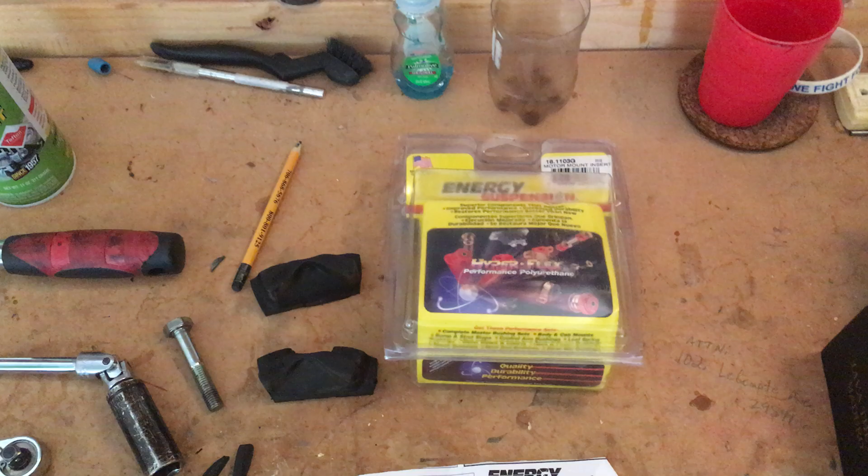Hey, what's going on? This is a review of the Energy Suspension Hyper-Flex motor mount inserts for a 5th generation Prelude. This will also work in a 4th generation, I believe. I'm going to just quickly talk about install and impressions.

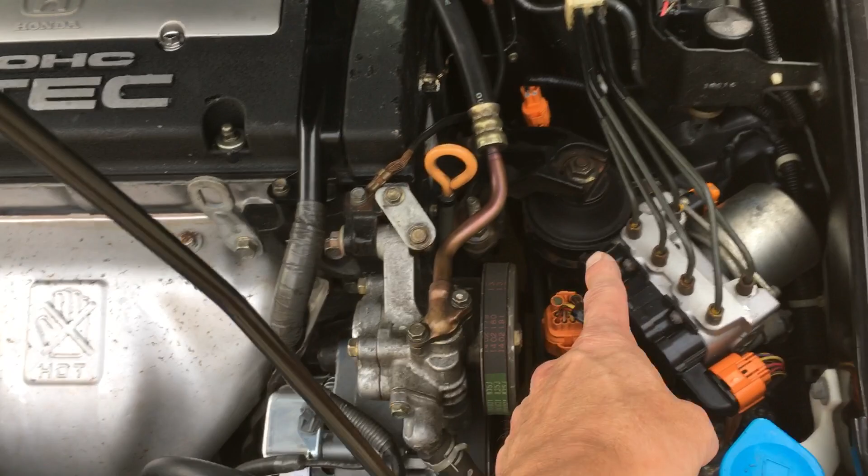So let me show you the car. I've already installed it, so this will not be a detailed install, but I'm going to tell you everything I think you need to know. Basically, there's 4 mounts on this car. There's a driver's side, a passenger's side. There's a front right there, and you can see the mount insert in there.

It's this soft poly right here on either side of it. And then the other one is right under the throttle body. I'm not going to show it to you, but it's down there. If you're watching this video, you know there's one of the bolts right there in the center of the camera.

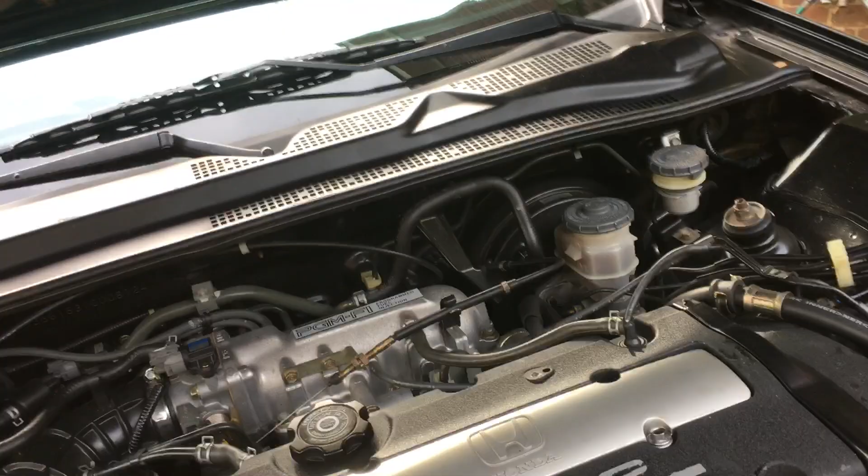So the idea with these is with traditional solid motor mounts, you get a better feel because there's more connectedness without the air in the soft rubber of the mount, but it also adds a lot of vibration. So this is sort of a compromise. You put a poly insert into the existing stock mount, and it increases the feel.

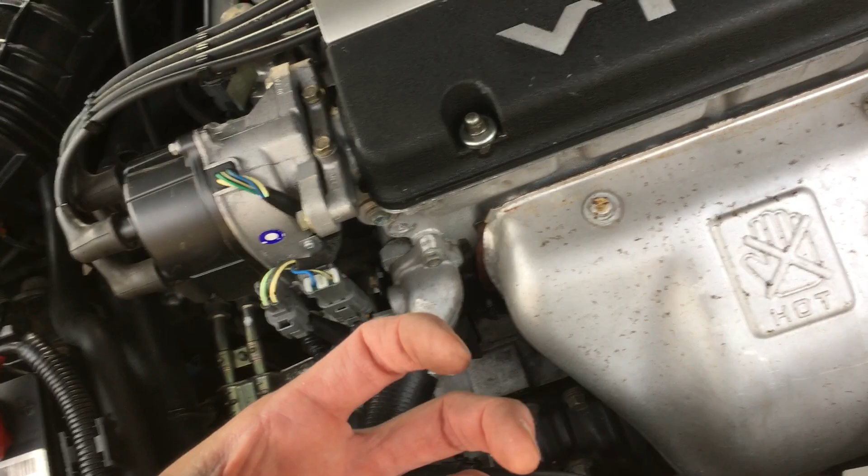You know, it's sort of like having shoelaces untied running, and then you tie them tight and you run. That's kind of the difference. You tie them tight, that's how it feels. So the car feels tighter. You get a little more sound, feel, vibration. It's more bassy.

And then also when you're shifting from first to second gear, or any gear, when you come out of gear, when you let go of the clutch and you come into gear, there's a little bit of movement of the engine, and you can feel it in the whole car. When you put an insert or a solid mount in, it reduces that, so it's instant. As soon as the gear engages, you get the power immediately. So it's a subtle difference, but it's enough to make a little bit of difference in feel.

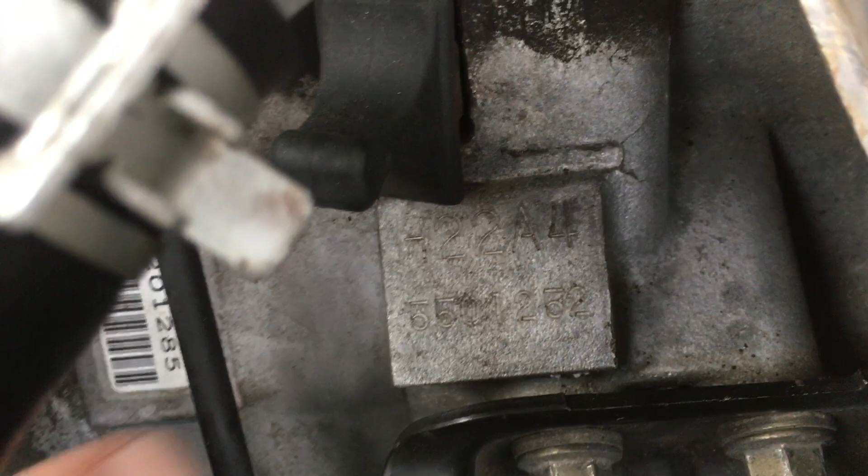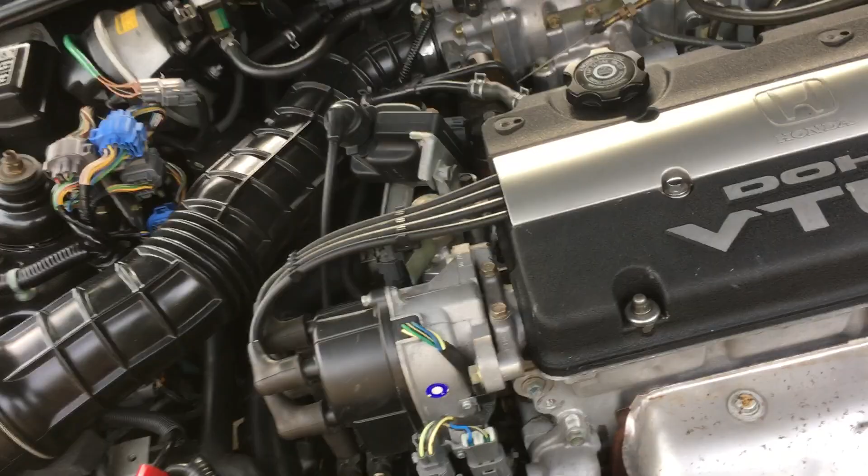And Honda's big engine, the H22A. So it's enough to make a difference, and the car isn't faster, but it feels faster because there's less slop in between shifts, is sort of the idea. So how do you install this? Let me show you.

This is all I used. I recommend getting some silicone lubricant. Spray that all over the mounts, especially when you're putting the inserts back in, because it makes things move in and out a lot easier. And basically you just need a ratchet. I pretty much did everything with a 17, a couple extensions, and a universal joint right here at the end. And then you'll also need a 14 and a 10, which I'll talk about. But let me just talk about the install real quick, and then I'll talk about impressions.

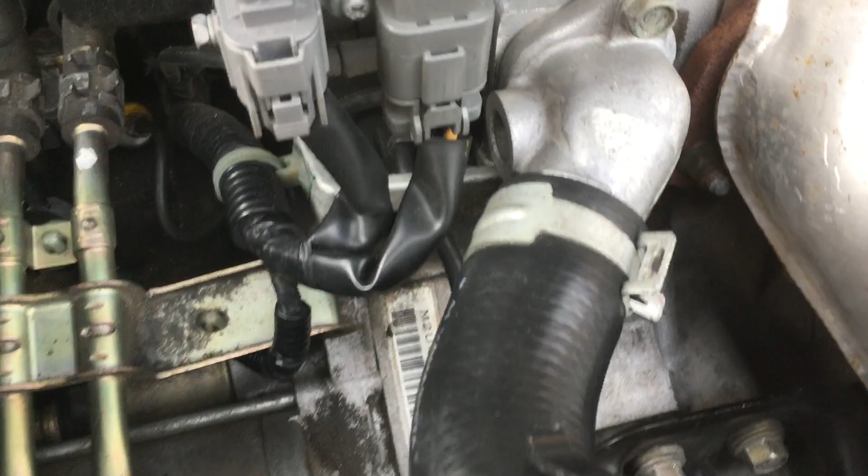So basically you get the car up. I put mine on ramps, and then I put a jack under the engine with a wooden block, lifted it up a few millimeters, and the front is fairly simple. You just remove that 17 right down there in the center of the video, and then you remove these 3 17s, I believe, also. Actually, no, those were 14s, I think. And then the bracket comes right out, and then you just put the insert in, and then you put it all back together.

And then back here, I read one review, the guy said you'll want to set your car on fire after doing this. It really wasn't that bad. All I did was just remove the intake tube. I left the throttle body on. You can reach all 4 bolts with this.

The 1 bolt you'll go in from the side, which is the same bolt here that goes into the mount. And then the 3 to take the mount itself off the car back here. 1 you can go here, 1 you can go here, and the other I went right here in front of the throttle cable. And you just fit right down there, get a flashlight, and it just comes right off.

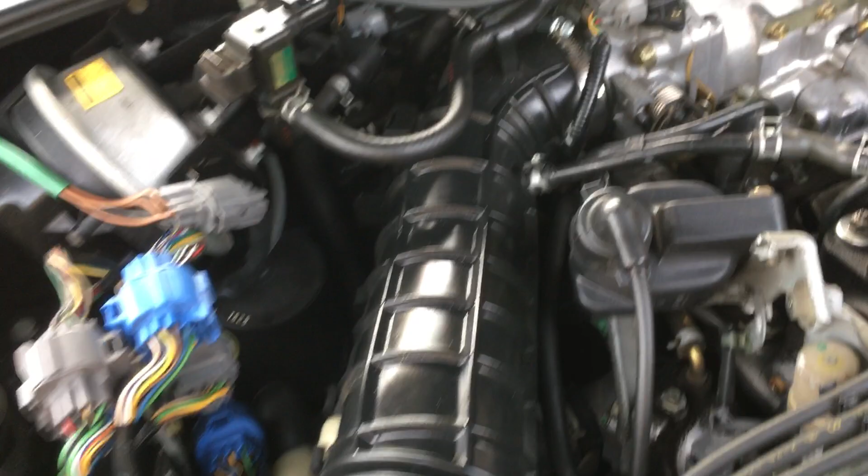All 4 of them, rather, came off very easily. A few install notes. There is a 14 millimeter nut holding a little piece of iron on to the top of that back mount. You can take that off real easily. Just remove the nut and pull that piece off, and it'll allow it to come out a lot easier. Make sure you put that back on, though. It is a dampener for vibration, so if you don't put that on there, you're probably going to have more

vibration than you want. And another thing to note, I told you you needed a 10 millimeter socket because the blend door mechanism for the cold to hot is also right back there against the firewall. You'll see it when you're at the mount. And just take a 10 millimeter and loosen that.

You don't have to take it off, you just loosen it, and then there's a bolt coming out of the firewall, so once you loosen the nut, you can take that whole mechanism assembly and move it around, and that will give you more room to wiggle the mount out, and it comes out a lot easier. I did the front in an hour and a half, I did the back in an hour.

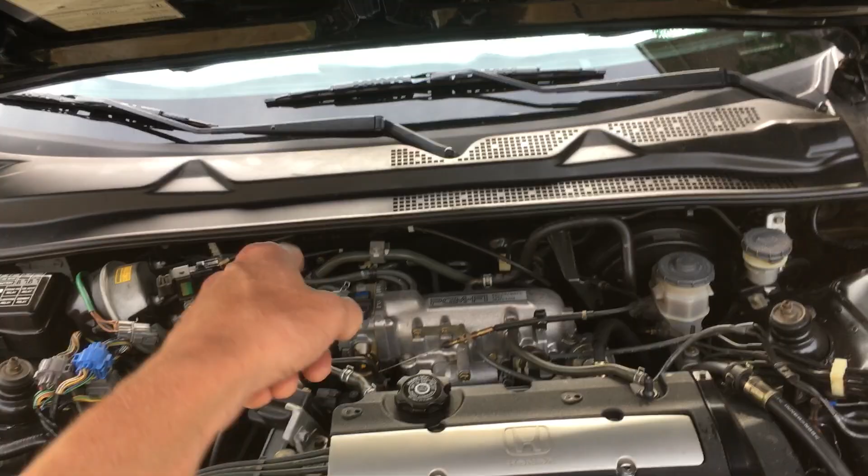The back's actually the harder one because there's less room, but I did the front first. I was probably going slower, and I had a little hard time re-engaging the bolts, but I did everything in about 2.5 hours start to finish. And a couple more tips that I wanted to show you in here that might be helpful.

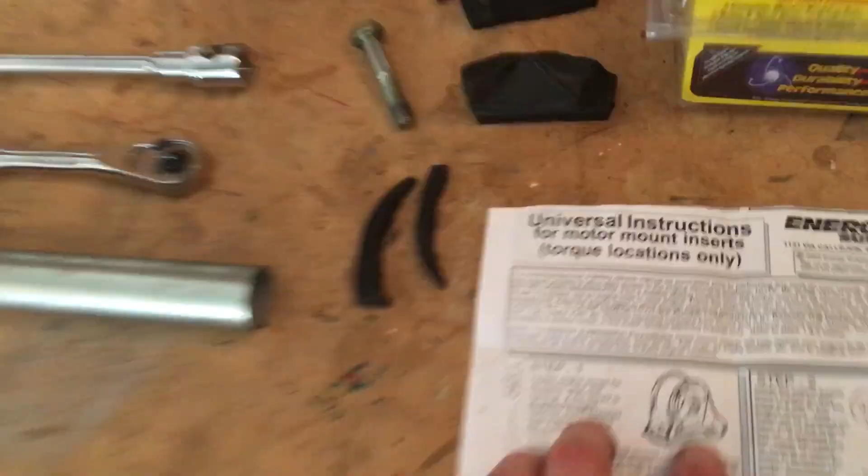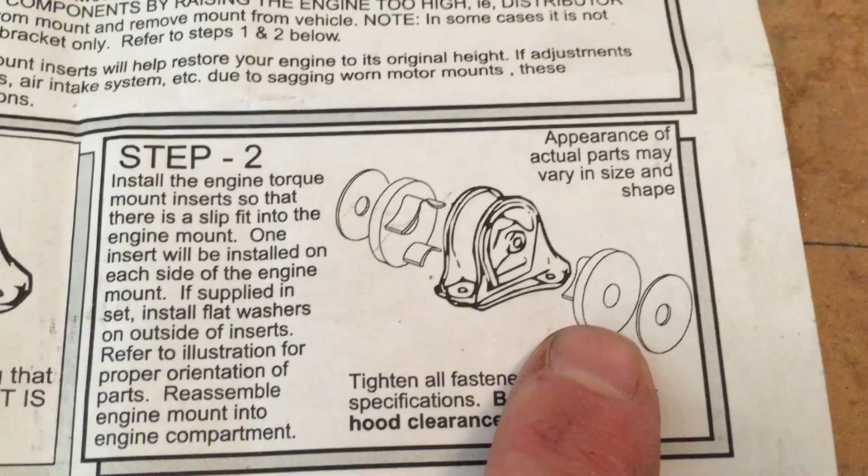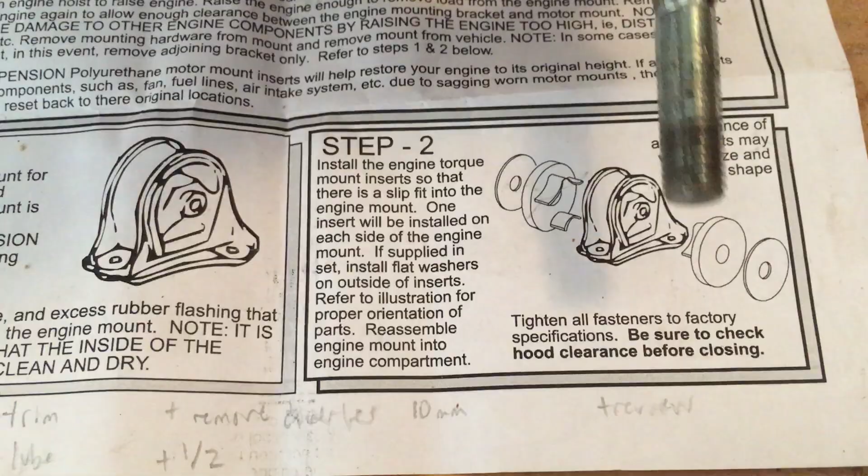So the back mount looks just like this. This is the front of the car and this is the back. So you got one here and one back here. And when you're putting this in, the material of the insert itself is in the way. So when you're trying to re-engage this bolt into those back two holes to put it back into the car, it's going to hit the material, and that's why I trimmed the material.

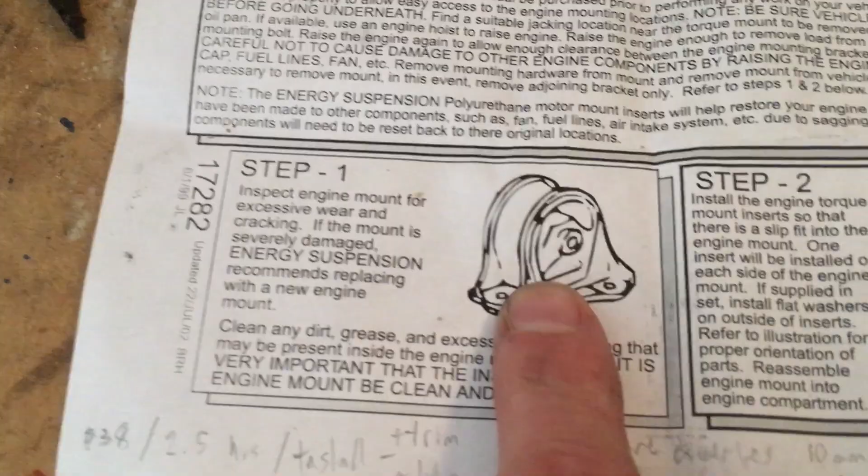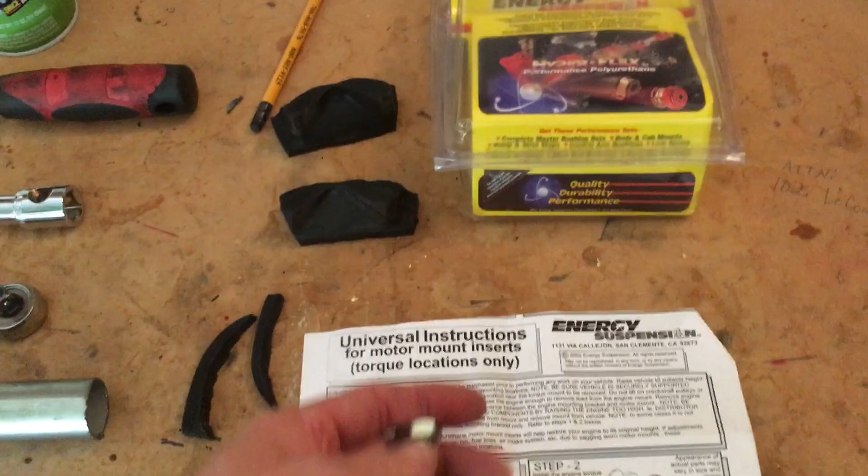You'll see what I'm talking about once you put the material back in your rear mount. Just before you stick it in there, shave off enough here where that bolt can engage easily. Otherwise, what I did is I put the whole thing in, and then I couldn't get the bolt seated because the material was in the way. So I had to take it back out, shave it, and put it back in, which is a pain in the butt. So do that on the front side.

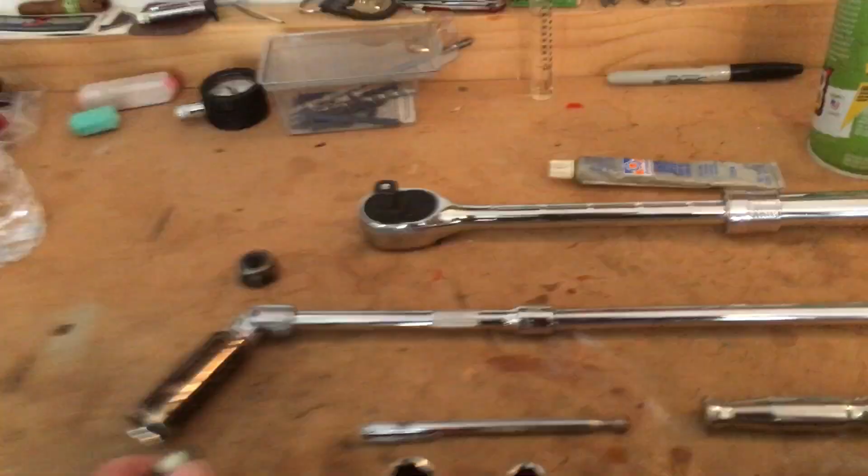And then, let's see, I talked about the 10 millimeter. Oh, the other thing I wanted to mention was make sure you use plenty of lubricant. So imagine those holes, say this is the hole where the bolt went into. Once you pull the bolt out, in my case the car is 19 years old, so you've got grime and gunk and all kinds of junk in there.

And when you pull that out, let's say there's a little pressure, you might shear the threads a little bit. So you could have little metal shavings or dirt or oil or grime, and it's going to fall into those threads, the female threads. And then when you go to reinstall, it may not want to take, especially the aluminum, which is the front.

The front mount is going into aluminum, so it's soft. And if there's any compromise in there in terms of grit or anything, it's going to try to cross thread, especially if you don't have it lined up, which I'll talk about in a moment. So I would really recommend, this is what I did.

I sprayed the whole mount, the insert, the male threads, the female threads in the car, everything I sprayed down with lubricant. That way it cleans it off and you're working with lubrication so you can easily reinstall it.

If you don't do that, you're going to risk cross-threading, you're going to risk contaminating the threads, etc. So I would recommend spraying things down. And yes, that could cause things to back out easier. But hey, next time you check your oil, take your socket and just check everything and make sure it's tight. I've not had any problem with it.

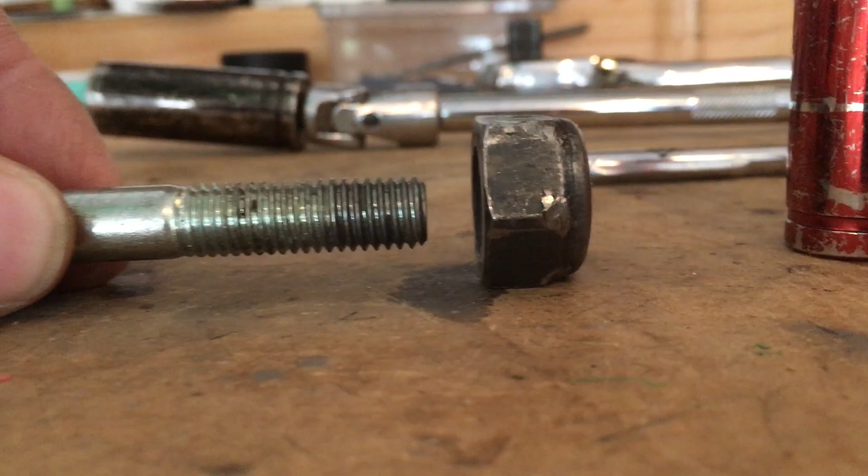And then the other thing I thought was worth mentioning is, when you are reinstalling, and I ran into this, that's why the front took me a little longer. So when you jack the car, just imagine this is the female and this is the male, and you're pulling all those out. You pull it out, right? But then you're taking your 30 minutes and you're having your Pepsi or your beer or whatever, your friend calls. And in that time, if you have a hydraulic lift, it might slowly do this.

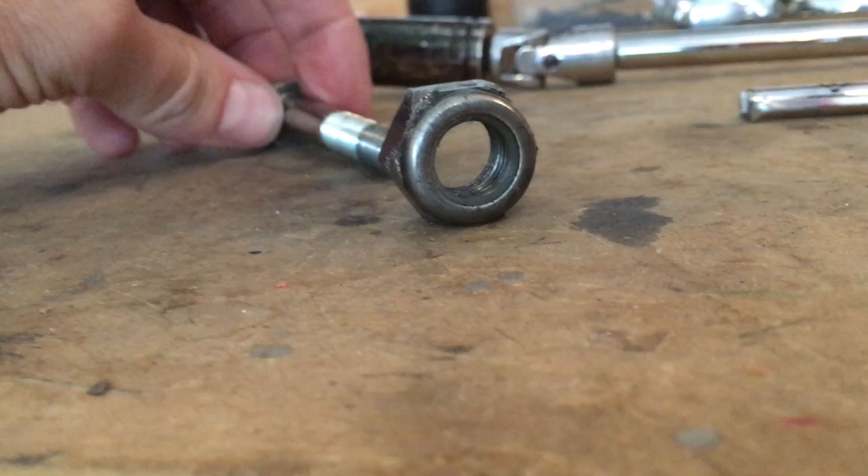And then when you go to reinstall, you're going to have this problem. And again, that could cause cross-threading or whatever. So you just want to make sure, in my case, I took a mirror and a camera, and I just looked in there before I reinstalled, and I made sure I was lined up. And in my case, I wasn't, both front and back. It had just sagged a little bit. So the engine's going to move around anyway.

So just make sure you play with your jack, because you're jacking the engine, and you just want to jack it, move it around, whatever you need to, so that it can go right in. And it will go right in. If you're having a hard time re-engaging any of the bolts, that's why. So you need to move the engine up or down and make sure you're perfectly on. You don't want to go in at an angle, or be trying to do this. It's not going to go. Again, use lubricant and everything will be fine.

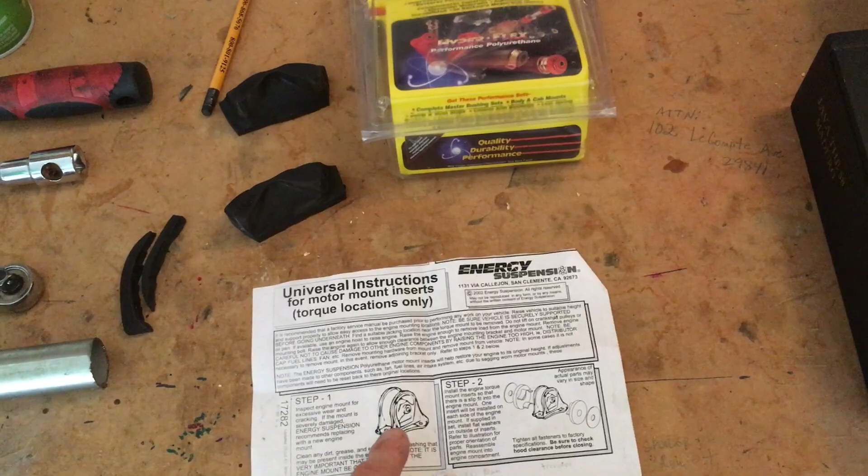Review of the product: it's really great. Final thing I want to say is that I ended up cutting the back mount in half, because when I had everything installed, it was just too much vibration. Even after a week, I drove it a few hundred miles and it was just too much with the air conditioning on. The car was loud and it was rattling. It was just too much for me. I wanted a little bit of comfort in the car. So I ended up taking the back mount back out.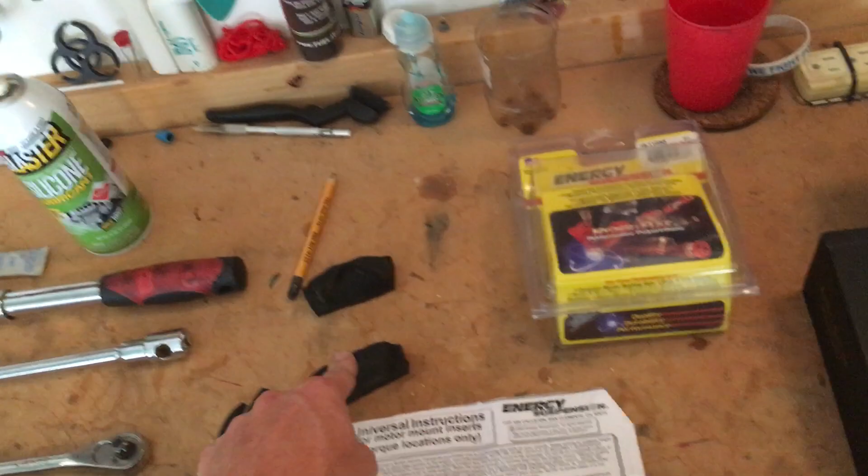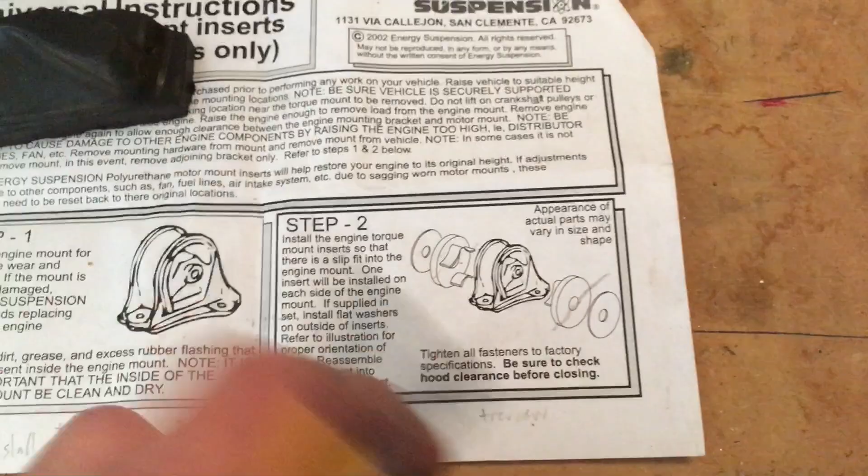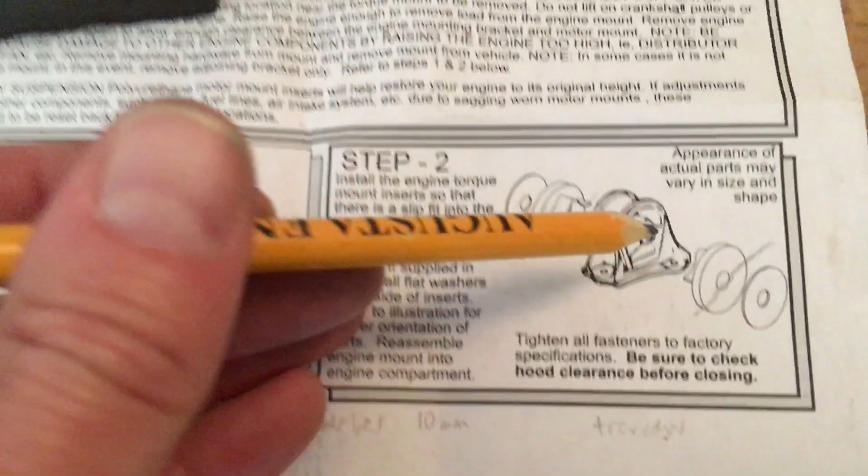I cut it in half, and this is the bottom half of the mount. If you just imagine right here, this being the mount, I cut the bottom half off, which goes in the smaller hole. This is a hole, and this is a hole. The top hole is shaped more like a C. The bottom hole is more flat. This is the bottom. So what I did is I put the top piece in, but I left the bottom piece out, which was the smaller piece.

And that was perfect. With that installed and everything buttoned back up, there is hardly any extra vibration, but it really improves the feel. And you might say, well, that's going to compromise it. It's not. It's no big deal. It's just basically putting less material inside the stock mount than you would have. And if you don't like that, I could always just take this and pop it back in. It's clamped in by the bracket, so it's held in tight. The fact that it's cut in half is going to make absolutely no difference.

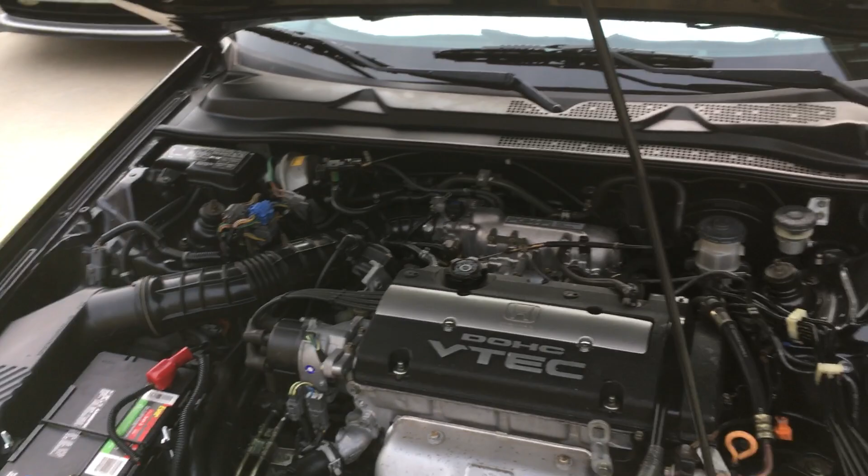So it's perfect for me like this. I really like it. Again, it took a little bit of experimentation, but I highly recommend the mod. It's like $38 on eBay right now, not a bad install at all, and made a nice difference in the car.